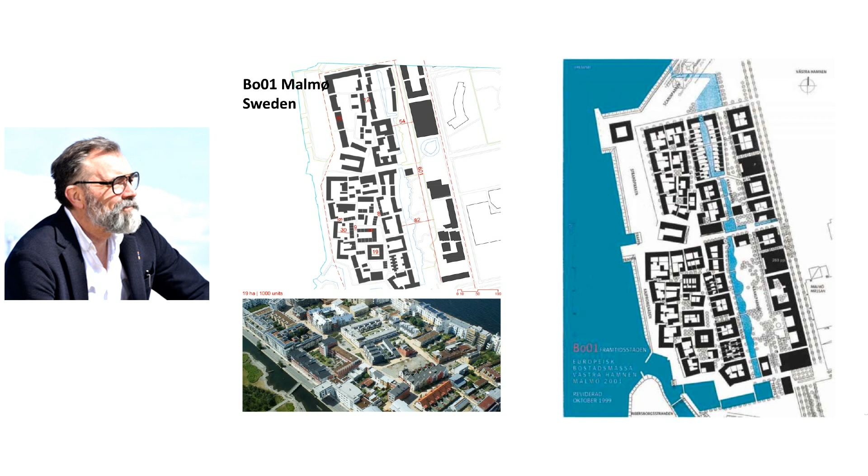Now, something completely different. Stephen, you just mentioned you've been awarded after, was it 10 years of use? I went over to Malmo to see this development, BO01 in Malmo. This development, 12 years ago, it's finished. I went to see it this last summer.

I just love this intimacy, and a lot of things Stephen's been talking about earlier today, you can recognise in the planning here - these small urban blocks within the master plan and these different footprints. Please note, there's no cars coming in here, it's only for servicing. Parking is all underneath, hidden away. So all the pictures I'm going to show you now, there's hardly any cars at all whatsoever.

It's a fantastic place. The scale of the developments out towards the seafront here is quite tall. These blocks here, in the summer, are just so popular with citizens of Malmo. Then you come into the interior of this space - you'll not find any walls built here, front gardens or anything like this. This is all dealt with by creating soft edges to your accommodation, creating some kind of safe space which is yours, rather than fixing it up with fences and things like you often see here.

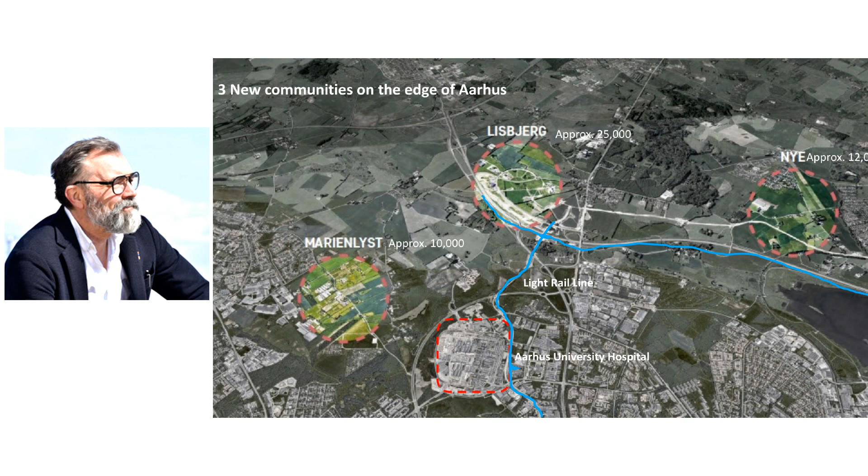This one at Lisbjerg has been built on an area where the farms are in the inner city, in the town area, with radial land fields and planting. These are the different themes - I'm not going to read them up, you can see it, you'll get the presentation afterwards. But the whole thing is landscape led.

It's very, very important in terms of trying to instigate for the developers when they sell the sites from the council - all these pointers have to be taken into account. This is the master plan, zoning in conjunction with Vandkunsten. You'll see this name again shortly.

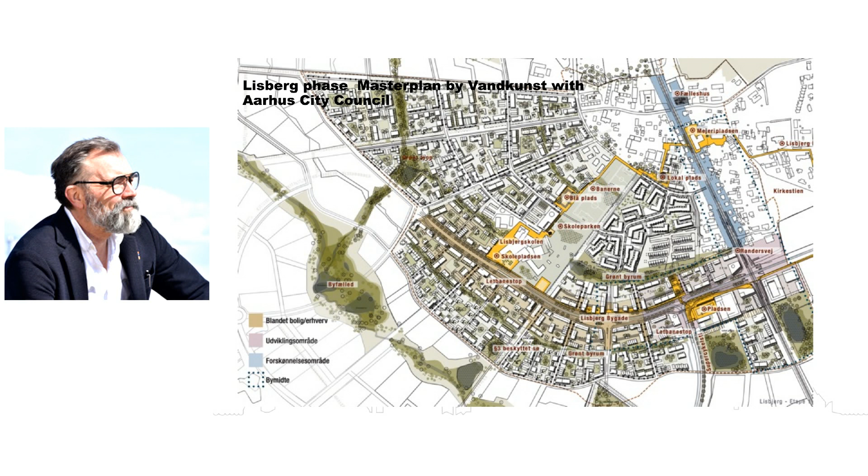I'm going to zoom in on a couple of sites here which I find very interesting, worthwhile discussing. This one was designed by Lendager Architects - they're famous in Denmark for working with recyclable materials in their projects. It's called Made in Aarhus, because the materials used on the facades are sourced from projects which have been demolished or reused in Aarhus.

These are lots of different types of accommodation, 1 story, 2 story, 3 story, 4 story in some places, but you see they're made of timber. Again, all the SUDS are included in each courtyard, so all the water from the surface of each development has to be dealt with on each site.

I love this. This is a shared space for the local kids to play with, or you could hang your clothes out there to dry. It's been generous in terms of giving something back to that community.

This is looking the other way. There's another - this is where the staircase is, of course, lifts. You see the child areas here, bikes. These are not locked, these chairs are not chained to the walls or anything. You can nick them if you want to.

But Denmark's got the highest level of trustworthiness in the world, so you don't expect anything like that to happen. It's a slightly different situation here, I think. But I love it - and the bikes, these are locked, I know this, but someone could take it by mistake.

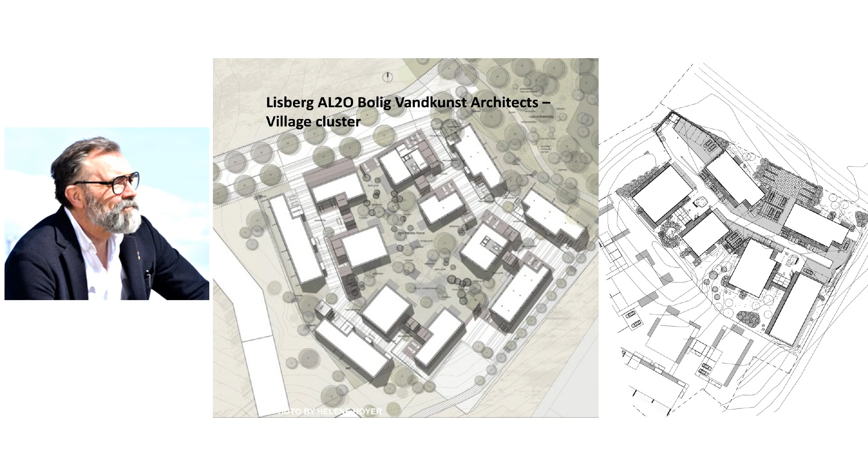Another scheme very close by. This is one of the first projects built by Vandkunsten with a very intimate scale. If you look at the plan, it's small units, pockets of parking here and here between the buildings.

5 years later, it's patinated like this. It's larch, so it's gone grey. I think it looks really good.

That's another example here, the new community. This building here was on site, obviously, when it was being built at that time. But the picture I started with is this one, designed by Big. This is by Loop, this is by Art Architects. There's a whole bunch - this is private development taking place as we speak.

The developer called Tækker has bought this whole area on the northern part of town. He's developing these - some of them are rented, and some of them have been privately owned. So this is a Loop project. This is the first ones built there, made of timber, built around this small pond, bringing all the water together.

The gutters are built in on the timber roofs here. Look there - I'm not sure how the insurance company would do with that in the UK, but it looks dead good, doesn't it? Another timber scheme next door.

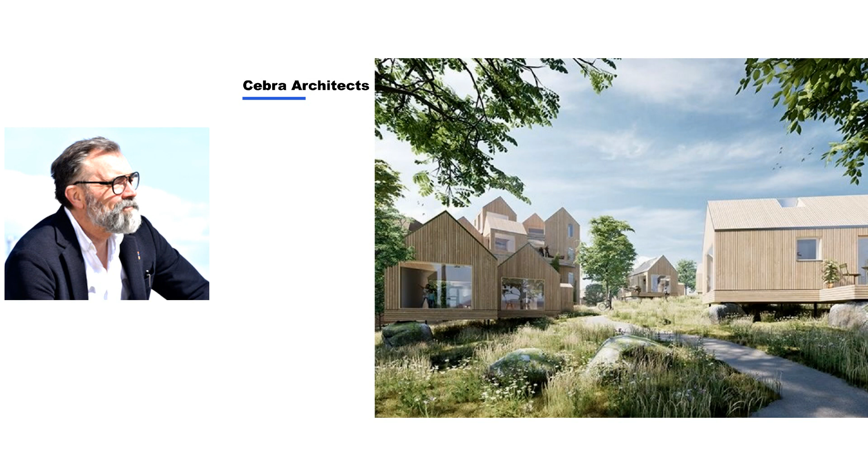The developer here, there aren't 8,000 people here, but he knows to get people to move here, he has to sponsor this kind of shop. And they have fantastic wines. People are coming from all over the place. They have events, wine tasting, fantastic products, all naturally sourced from farms locally. So it's an eco shop, and people are coming here just to buy their banana cakes and all these different fruit cakes.

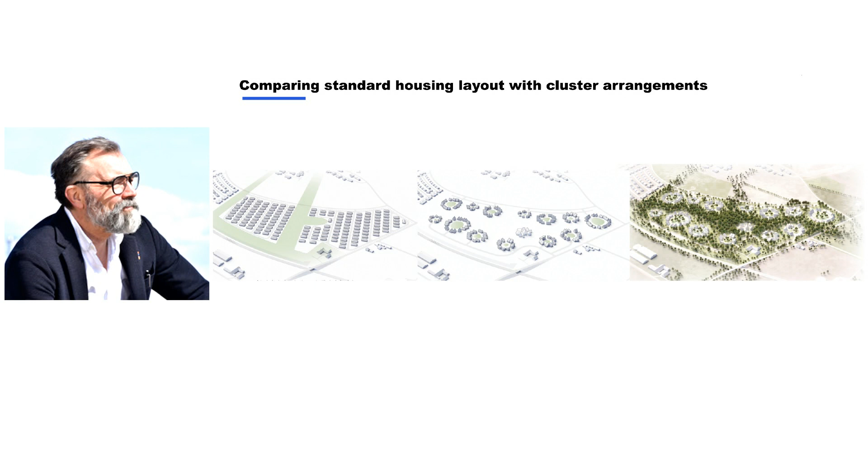Just regarding these clusters and housing, this is a typical housing scheme diagrammatically. But the same numbers of housing have been positioned in a different way on the site, and the landscape is arranged here, so the forest is in here, arranged in not a complete circle, but a slight circular form, different orientation.

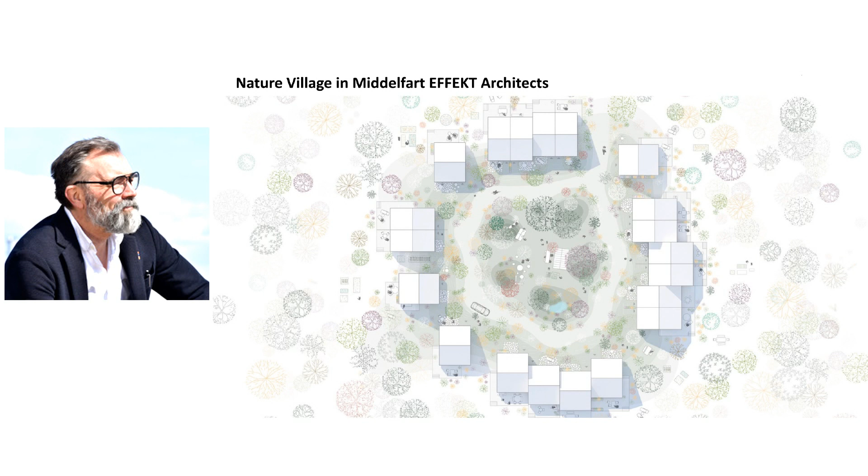You'll see there's no walls around the edges creating defensible spaces and things. It's all quite open, and it's looking like this. This is going to be built in a place called Middelfart on Funen. There's one scheme here, another one here, different type of form, all made of timber and super eco properties. It's possible.

Another smaller scheme in a rural setting. This is a station town. This has been built as a market space, looks something like this on the interior. I love it, I love the timber structure. At the end here is a little shop, you buy local products and things.

What I want to show is this project here. It's a co-living community for senior living, plus 50s - I say senior living, I should really say plus 60. But this is the first stage that's been built by Vandkunsten.

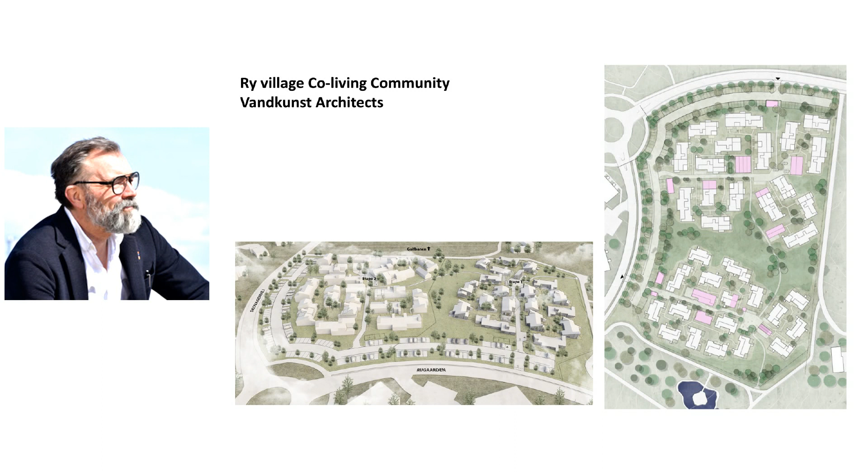And the pink units are shared properties in the middle. So this is what it looks like in timber. This is just after it was built. I have a couple of pictures where it's been in use.

What are you laughing at? Too much sharing.

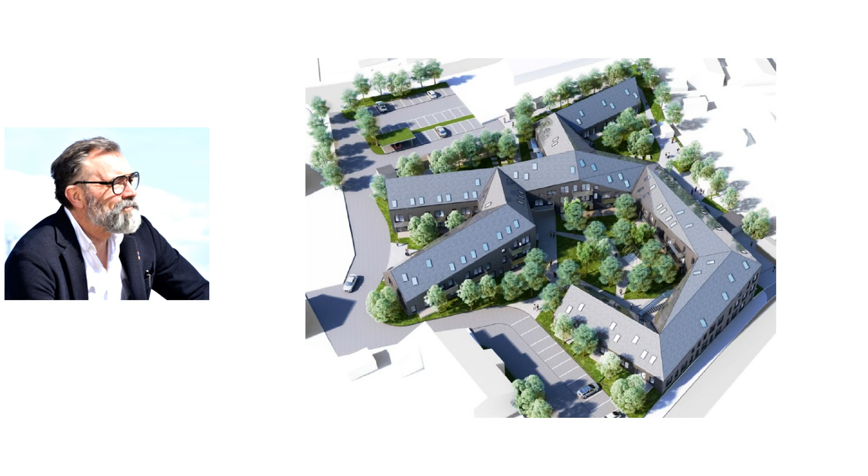Well, this is a rather interesting scheme. I call it a little bit stealth in terms of its roof form and things, and the way the apartments are arranged. A lot of it's only been finished, so some of the properties are not quite used yet.

But you see, this is just opening up straight from the living room, you can look into the rooms here. See, these are all quite visible, so there's different forms of visual protection, but it's very sculptural. And you can see you can go through the development and the central parking area on the outskirts here.

Just see that parking area here, a little bit of parking down here. It's not in the development, so it's quite a compact development. But it's got a very distinctive architecture and a feel about it, which I feel is adventurous, designed by Zebra Architects.

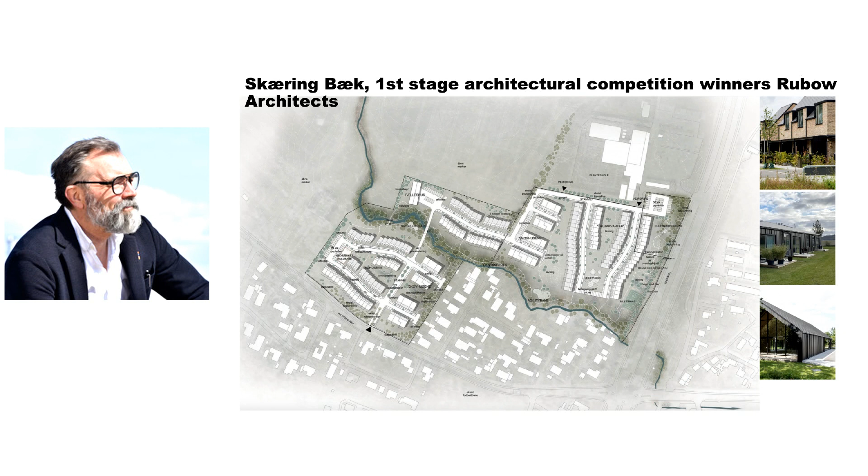Another scheme on the outskirts of Aarhus, social housing for AAB Housing Association, designed by Rubow Architects, a competition scheme. This is the first stage. It's not been built yet. So these are the developments I'm going to show you here.

But there's a small Beck. Beck means pond or river. Yeah, Beck, it's the same in Scottish, isn't it? Beck, Cumbrian. Yeah, Cumbrian, sorry.

So the SUDS are integrated into the development here, also in the central parts of it. This is just after it was built, I do these pictures when they've been built and then come back later to see how they're doing. I was involved in the competition for this, following this up.

This is the central street, parking pockets, small gardens in front, small sheds, integrated into the access porticos here. These types of entrance porticos have a nice threshold between the entrance area, place for parking perhaps here, but also to dry your clothes or whatever.

The second stage will look like this. This is another type, the development here I've just shown you. This is a competition won by Everyday Studio, ALL, Atelier Lorentzen Langkilde and STED.

They've arranged the accommodation around these small clusters. So it's one cluster, but small clusters as well. It's a very attractive small development, two stories high again. I think there's a very nice feel about this, and this whole shared area by this whole community.

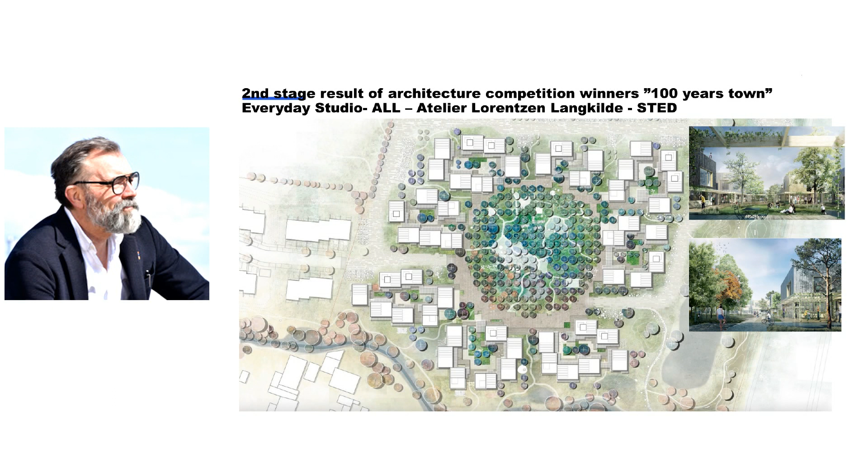And one of the old buildings has been retained and is used as a shared eating place, and laundrette, and kitchen, and things like this. Very popular. And each student accommodation has got a gallery in it—a little ladder up, little kitchen, toilet, sleeping upstairs, and it works incredibly well.

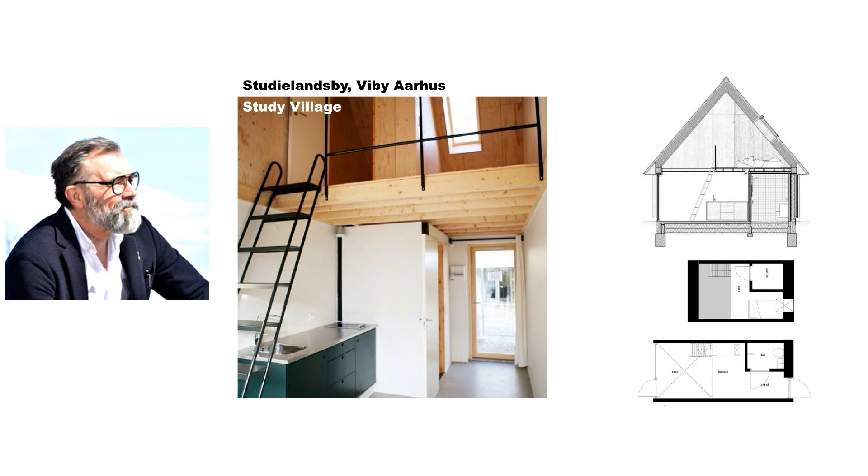We're going to make it into a private school. They started talking with the council, said, we need to keep this. We can't have these empty schools and village halls, things like this. We need to start talking together.

And the senior citizens are making events with children groups, reading sessions, baking. So there's a kind of win-win—the elderly love the small ones, and the small ones love the elderly. And there's all these different stories come out from their childhoods. It's a really nice generational move here.